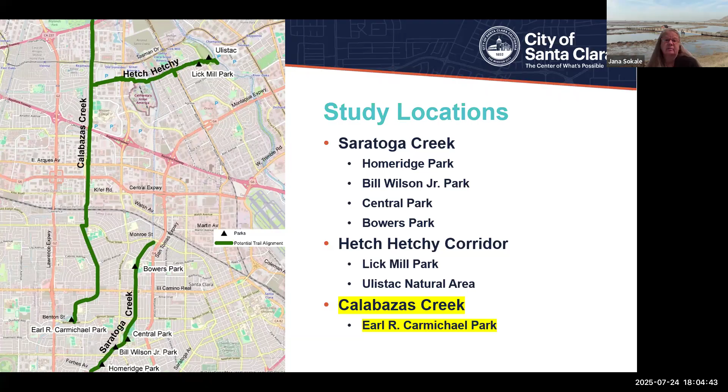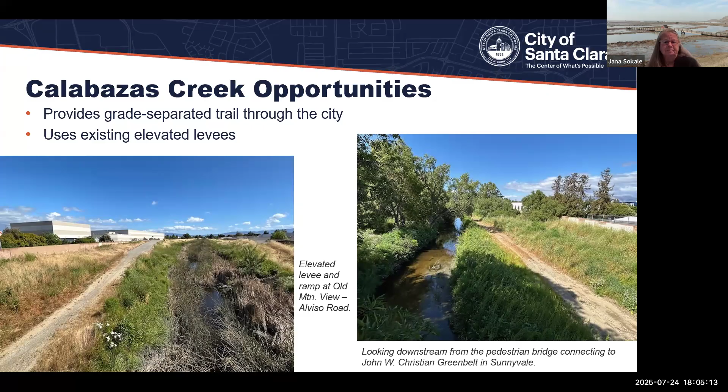Calabazas has many great opportunities for the city. I would say that it's most similar to the existing San Tomas Aquino Creek Trail that many of you may use. Most of the trail would be built on existing elevated levees that are owned and operated by Valley Water. The trail has many connections, direct connections into Caltrain and light rail, connections to area schools with Mission College and Wilcox High being right on the alignment. Businesses along El Camino would be served by the trail. You could ride your bike out to the AMC Theater Complex at the Mercado Shopping Center. And it would also connect to the proposed Hetch Hetchy Trail that provides access to many other key amenities within the city of Santa Clara.

None of these trails come without challenges. In order to provide a trail which is separated from car traffic, in evaluating all of the bridge crossings over Calabazas, we determined in the feasibility study that it would require 3 pedestrian overcrossings. Those are expensive structures, which pose a challenge. We also have new challenges that are ever evolving with climate change. Sea level rise has the potential to impact both existing trails around the bay as well as new trails that are being proposed. It's anticipated that some of the downstream trail underpasses would flood more frequently, and we need to consider those things in design.

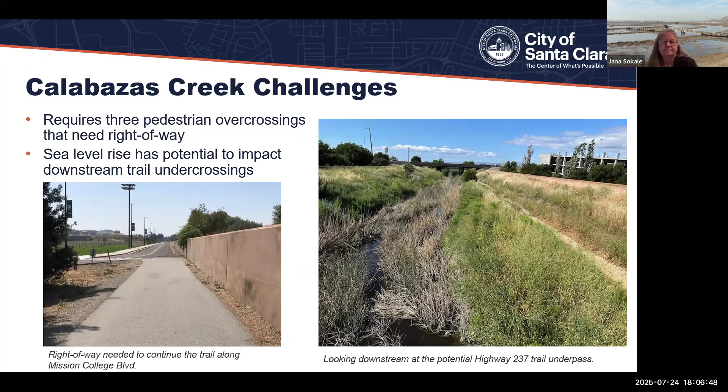So we have done quite a bit of community outreach. The city showcased this project both at Earth Day and Bike to Work Day. We introduced the Park and Rec Commission to the project a couple of months ago. We held a general community meeting introducing all 3 of the corridors and collected information from the community then. I believe that meeting was in person as well as hybrid. And since that time, we've done individual meetings on the 3 corridors.

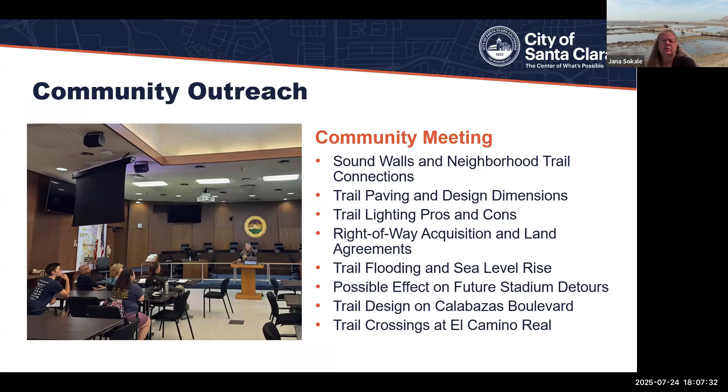We also went to the Pedestrian and Bicycle Advisory Committee, who had a number of comments on all 3 corridors. Some comments specific to Calabazas were the need to identify on-street routes for when the trail underpass is closed due to flooding. There was an idea to redesign Calabazas Boulevard so a trail could be near the creek yet still protected from car traffic. There was also a concept to identify easy, less expensive segments to implement first, plus additional comments spread across all 3 corridors.

A survey was conducted in the May-June timeframe. We asked 10 or 12 questions of the public. I could just highlight a couple for you.

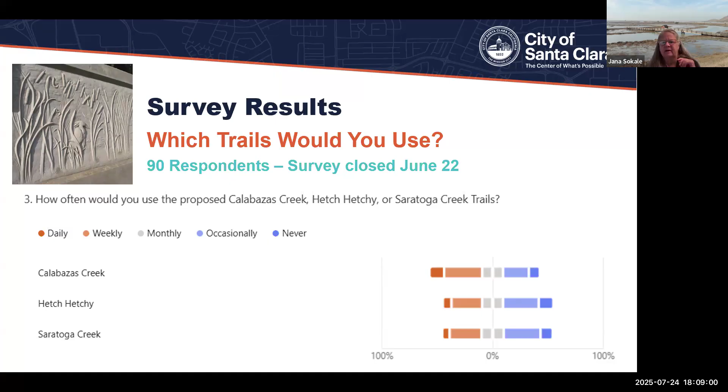We also asked trail users and survey respondents what they wanted most for amenities along the trail. These are the top 6 of the maybe 15 we queried on. Trees and restrooms were the top two, followed by shady trail and access to rest spots, bottle filling stations for folks trying to move away from plastic, trail maps and wayfinding signs to get around through the city and to other cities, and then wildlife habitat enhancements and trash receptacles along the trail.

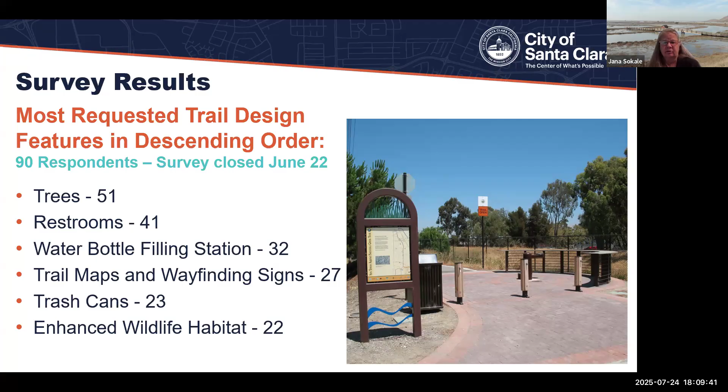Much of the emphasis is on the preliminary engineering, hydraulic analysis, and traffic analysis. And then from that will come reports.

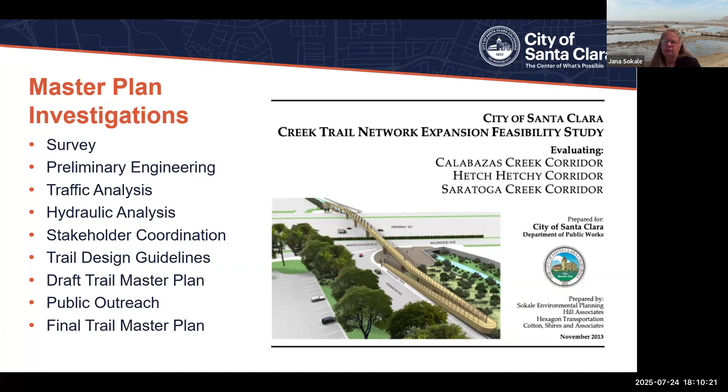When we look at feasibility and carry that concept into the master plan, there are a number of things that determine whether a trail may be feasible. The first, as you might assume, is land availability - who owns the land, are they willing to share it with the public, what easements cross that land, how wide is the top of bank beyond the hinge point of the creek where a trail might be located, what vegetation is there, what utilities extend through the corridor, and maintenance access to all of those utility providers as well as Valley Water must be retained.

And again, as I mentioned earlier, there's the whole aspect of climate change, sea level rise, and flooding - both from increasing tidal events as well as from potentially higher peak flows coming downstream during winter storm events.

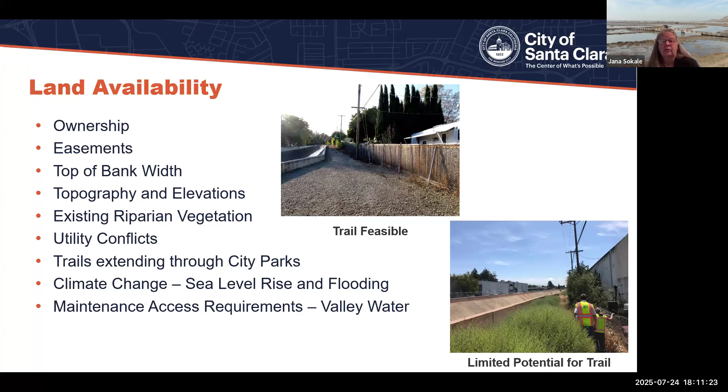There have also, since 2013 when the feasibility study was completed, been some changes in what I'll call stakeholder policies. The most recent one: Valley Water adopted criteria and guidance for how trails can be implemented on lands they own. The intent was to balance protection of stream habitat, wildlife, and sensitive resources with public access. Whenever we enter the environment, we immediately have an impact just by our presence, but also by construction changes on the land.

Hetch Hetchy, which is owned by the city and county of San Francisco, exists to convey large water pipelines from Yosemite all the way into Santa Clara and San Mateo County, and has historically been very receptive to having public access on their lands. You couldn't really build anything subgrade because the pipelines were there, but a trail on top of the land had always been relatively well accepted.

Now policies have changed over the years, and they're a little more concerned about opening access. They want to make sure good agreements are in place, and they want to preserve some of their right of way for future construction, or in the event of a critical event like an earthquake requiring lots of work on the pipelines. They now also charge fees for use of their land in order to be fair to their ratepayers who own and manage all of these lands.

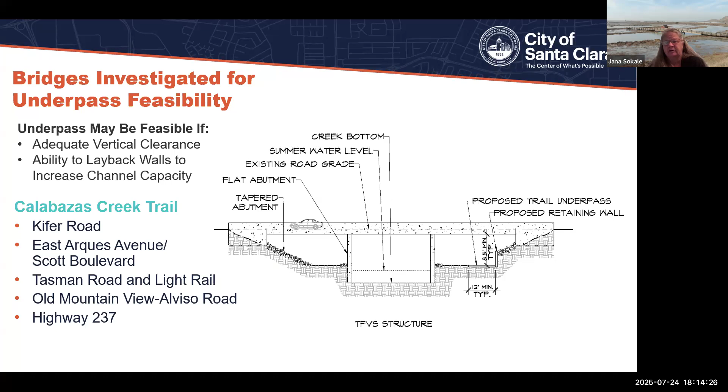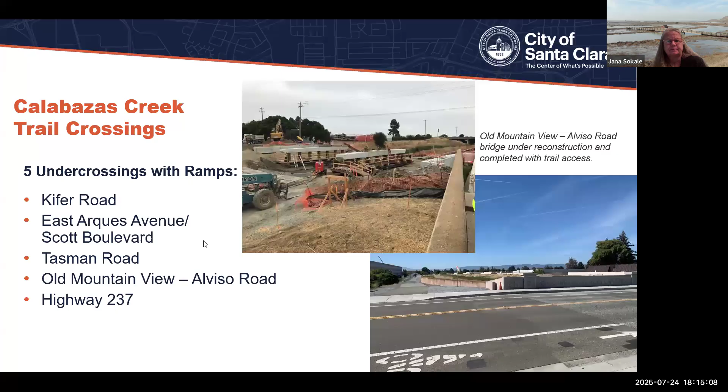There are also bridges that cannot support a trail underpass. Generally these are culverts, box culverts, where you cannot open the channel to allow passage for flow, and placing a trail into a culvert means adding fill. So overpasses might be needed at Highway 101, Caltrain, and Central Expressway.

There may be, and do exist today, at-grade crossings at Machado and Warburton, which are part of the bikeway plan along Calabazas Boulevard today.

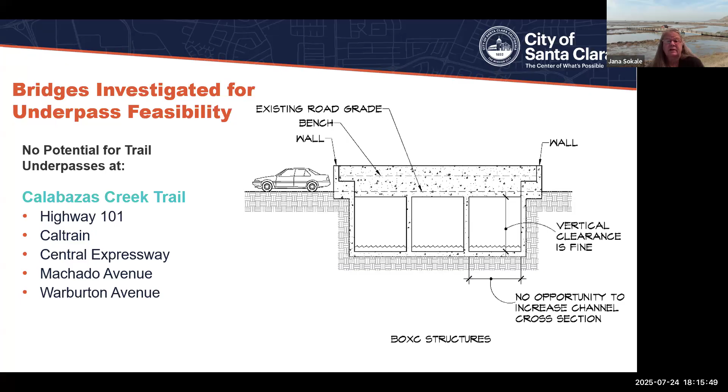There are other crossings that may potentially be needed. We mentioned the overpasses, and there are also some at-grade crossings. These are primarily along Calabazas Boulevard and exist today.

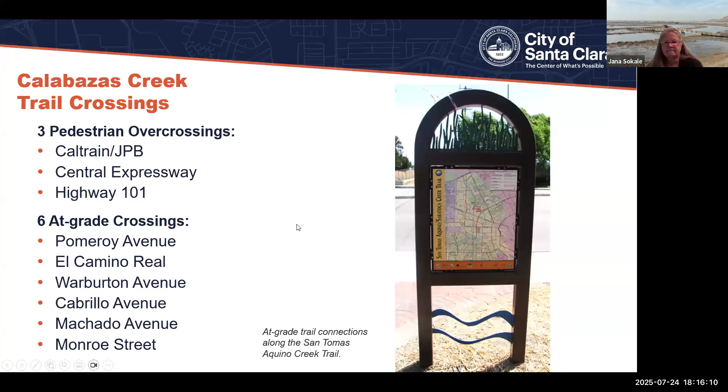There's potential also for two pedestrian and bicycle bridges. There's one necessary bridge to get to Earl Carmichael Park, which is on Benton, to get the trail from one side of the creek to the park side. And then there's an existing bridge that some of you may use, at Agate Drive. That bridge could remain or could be upgraded depending on the alignment selected at the Caltrain area.

We would also need to modify the bike lanes and sidewalks on East Arques and Scott Boulevard to accommodate pedestrians and bicyclists in that area.

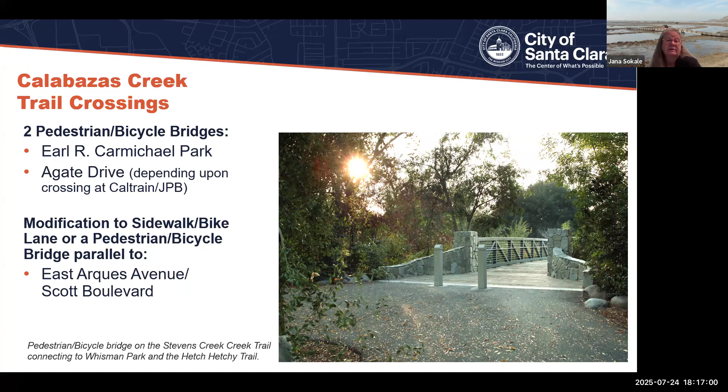We also worry about cultural resource sensitivities, though a little less so on Calabazas, because many of the places we're proposing trails are already elevated levees built on fill and not native soil.

So with that background, let me now take you through the alignments. You'll see this slide a couple of times through the presentation. In general, if you look at Calabazas Creek, anything in green gives you a sense that a grade-separated trail with underpasses and overpasses is potentially feasible. The purple line you see here is mainly Calabazas Boulevard, where we cannot put a trail below those streets, so we've proposed a different type of solution in that area.

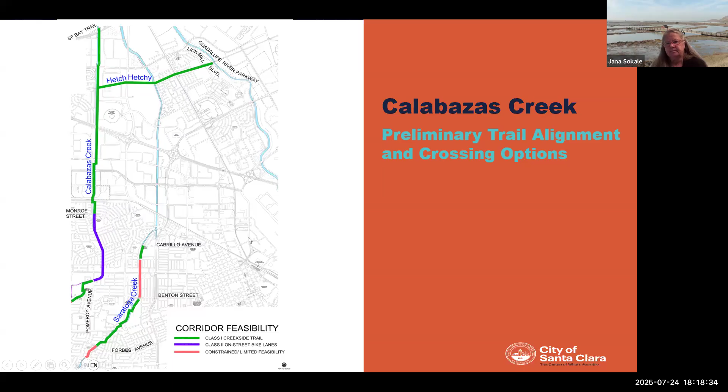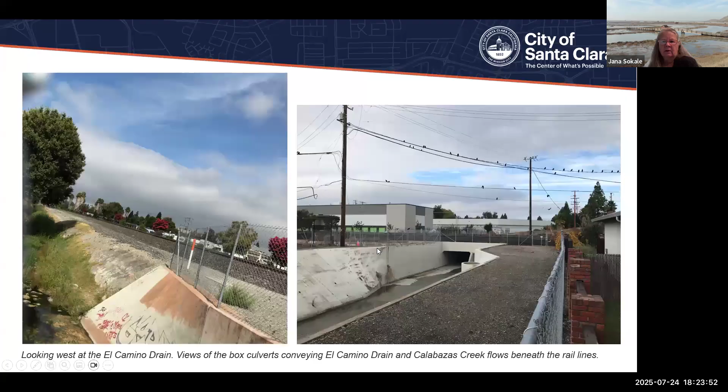So the ramping is long in order to meet accessibility guidelines and to get up and over the trains. It would then descend into a redevelopment zone that's along the creek to the south. That's one of those crossing options.

Let me take you to the second option. This option is a straight flyover, no switchback — all of these have different pros and cons. This would ramp up and over and then descend back into that redevelopment area.

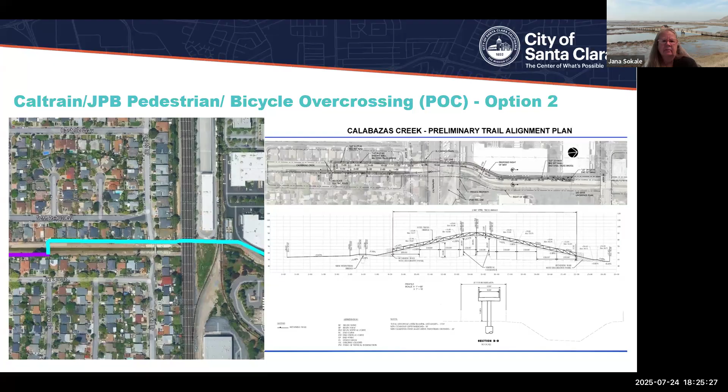The third option is an underpass — a tunnel option. This would stay on the right bank of the creek and would switch back down, and a tunnel would be bored underneath the train tracks. It would then come back up, switch around, and actually have to cross the Union Pacific tracks that still exist in that area. That train services some industrial buildings in the area and runs maybe once a week, so as of a couple of years ago that train was still active. That's a concern as to whether this option might be feasible or not.

Just to give you a sense of the three possibilities, all of these are being discussed with the stakeholders, including the Caltrain JPB, Union Pacific, Valley Water, and Sunnyvale, since some of these lands are in the Sunnyvale area. There's been lots of coordination to come up with an alignment that would serve the trail.

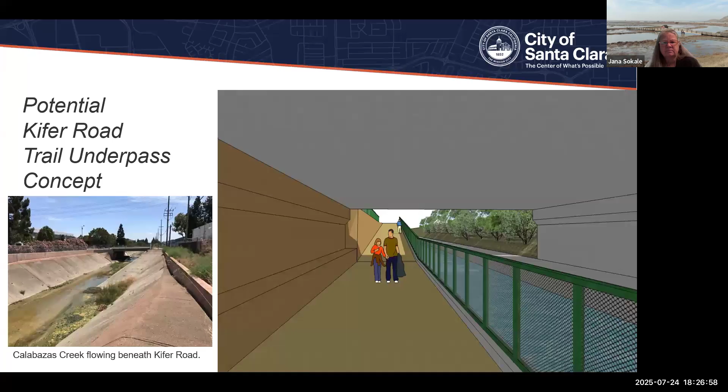The trail would extend along the elevated levees and descend beneath Kifer on a traditional trail underpass, shown in this graphic. I don't know that the railing would exist - we've been moving away from railings due to flooding issues, but it gives you a sense that you'd be down next to the water.

My thought is that at Central Expressway, the overpass looks very similar to this concept. There are some land limitations on the south side of Central where, as redevelopment occurs in that area, an additional 10 or 12 feet longitudinally along the back of the levee would be very useful.

Now moving downstream, we get to Highway 101. This is probably the largest span in length from a roadway that you're crossing. I'd say the JPB one is actually a longer structure because it has to be higher, at 27 feet. I think this structure is at 18 or 19 feet at height from the road surface.

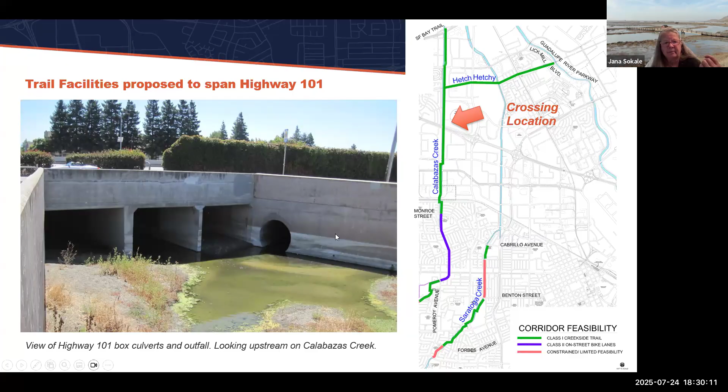Here's one view of what that overpass could look like. As it comes down to Mission College, it could ramp to bring people directly up to the crosswalk, or there's a possibility to extend it all along the flood wall. Mission College Boulevard would have to be somewhat rearranged to accommodate the space needed for the overpass in that area.

From Highway 101 and the Hetch Hetchy connection, the trail would descend below Tasman Drive, which conveys light rail through the city. On trail underpass, it would take advantage of the old Mountain View Alviso Road, where the head clearance has been created by the new bridge.

Then it would descend underneath Highway 237, ramping up to connect to the Bay Trail. Those two roads, Old Mountain View Alviso and Highway 237, are so close together that you'd essentially be down below the hinge point of the creek the entire way.

You can see from these photos that this area is tidal and has water year round, so there are sea level rise impacts to these lower trail underpasses in the years ahead.

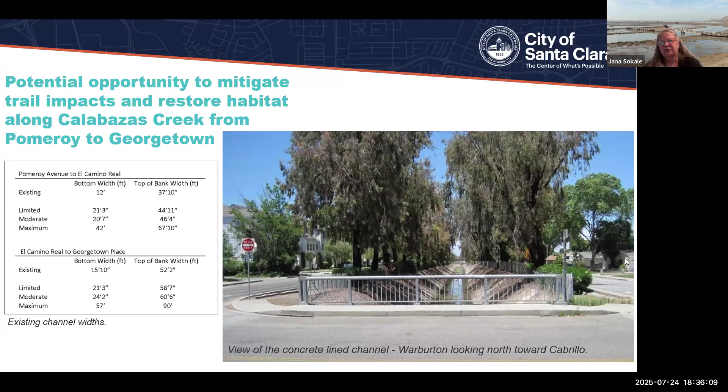We have looked at a way to re-green the corridor, several possibilities, which could give the city mitigation credit to offset the impacts of building the trails, and may even provide credits to Valley Water and/or credits for other projects within the city. If we go to the next slide, I'll show you one option. I want to preface this by saying the intent of this exercise was simply to indicate whether we could take concrete out of the channel, lay it back to create more flood flow, to provide habitat to create mitigation credits, and whether it would actually work hydraulically in order to continue to pass flood flows in these areas.

In doing that, you take away roadway. We have put together three potential options of what that new roadway would look like and how the creek could widen out, both north and south of El Camino because of the different widths that exist in those areas. This was not to come up with a specific design, but to determine what questions you would ask if you were to move forward with this. But the answer for all three options is that we have been able to find a way to pass those flood flows where some level of mitigation could occur.

This is the more limited habitat enhancement option. The next slide shows a more moderate habitat enhancement where the channel lining on both sides is removed, the concrete is removed, and the channel is laid back a bit. In all of these, you'll see a low flood wall along the channel, and then street trees planted outside and a trail along the creek.

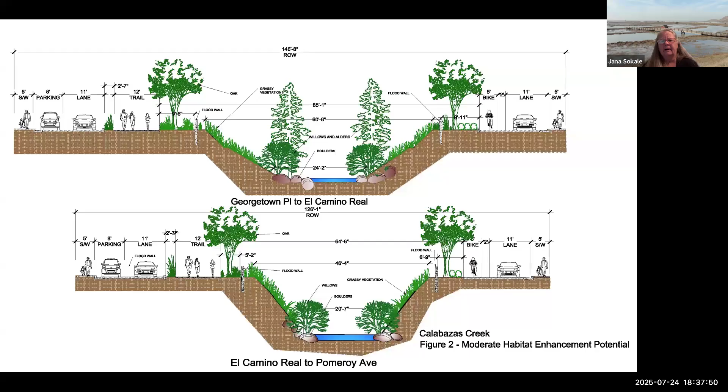And the third option eliminates even more roadway. The bottom of the channel becomes wider, and you get more of a low floodplain. Any of these would work, but it's a trade-off. You get mitigation credits, you get a beautiful green center of the city, but you lose some lanes of travel and/or parking - those are pros and cons you would have to consider. We were looking at a way to potentially find the mitigation necessary to move these trail projects forward, and this would have to be decided upon by all of the agencies involved.

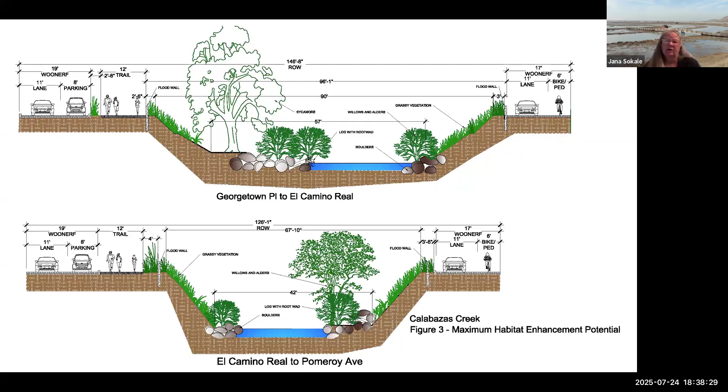And with that, just a reminder, none of these trail projects happen quickly. I think the San Tomas Aquino Creek Trail in the city of Santa Clara was built piece by piece in logical pieces that made good connections to the on-street system. But I think that took a good 15 years of construction and probably another 5 of planning in advance of that. But piece by piece, it happened.

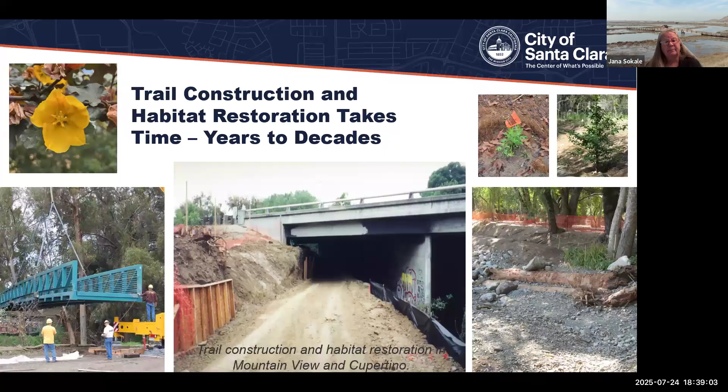Our next steps for this process will be to come back to the community with even more refined alignments in the fall or winter, circulate a draft trail master plan, and eventually come forward with a final plan in 2026. If you haven't signed up to get meeting details, please click on the QR code and add your name to the list.

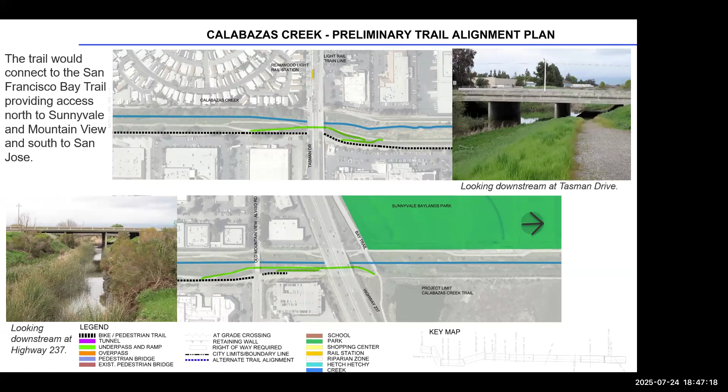Let's see, I put these in the Q&A, but I might as well read them off. There was one on the Agate Drive and the Caltrain. First of all, it's super important that we create additional opportunities for people to cross the Caltrain tracks, especially on foot and on bikes. That's a big deal.

I see at least one of the concepts here where you mentioned replacing the existing Agate Drive bridge. The existing Agate Drive bridge is part of a pretty important bike route that really goes all the way to Sunnyvale and even into Mountain View. So before you replace it outright, please understand what it's doing and make sure that the replacement also serves those functions. That said, I would be in favor of upgrading that bridge, as long as it's not holding up the whole rest of the project. Today's bridge is kind of small and seems a little bit old and rickety, to be honest.

And I've also found at least one time somebody parked kind of directly in front of the ramp, and on a bike you can handle that by getting off and walking a few steps, but in a wheelchair that might not be possible. So for the on-street part there, it might be worth painting a few feet of red curb.

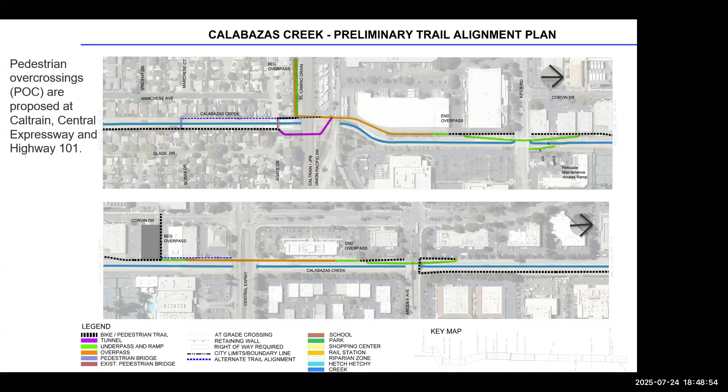There was a Caltrain crossing option number three that looked like quite a bit of tunnel. Yes, yes, and man, that creeps me out. I don't love the switchbacks and stuff. If we have to do that, we have to do that. But we need to think about how to make this not dark and creepy. I gave you an example.

They're actually doing some work on the 280 Winchester interchange sometime soon. But the Monroe and Moorpark has a big overcrossing, and then it has a tunnel, and that tunnel is dark and creepy, and I don't want to meet somebody in there, and it always smells like urine.

Betsy, one thing I failed to say in the presentation is the tunnel is open air until you get to the tracks, but you're still in a tunnel that's open to the sky. It would be sort of like a long canyon. Yeah, exactly, it'd be kind of like a canyon into a tunnel into a canyon. Yes, but better than being in a tunnel the entire way. Okay, but I hear you.

Those are still a little difficult. The bad example on the open air tunnel is the 87 bikeway, not so fondly called the jail trail by some people who have had to ride it.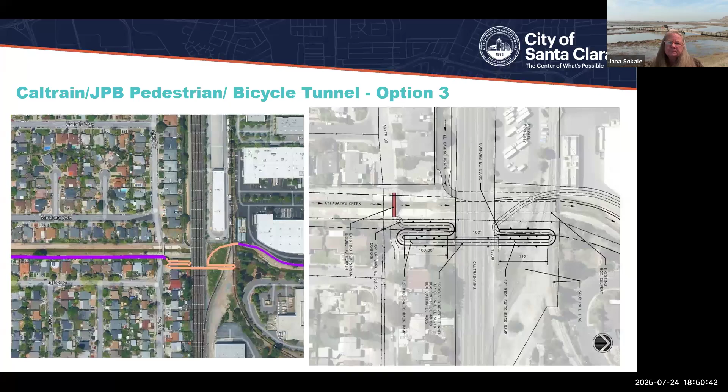Also, the switchback that you show in the Mission College overpass concept is a long way to walk. I think you got my comment the time before about making sure there's room to turn around a trailer or a cargo bike or trike or any of those things. I'm seeing an opportunity to put stairs up to the side of this, from somewhere on that concrete pad, for folks that would rather take them and ascend a little more rapidly.

And I know this is just a concept drawing for now. On Calabazas Boulevard, I hope we will come to a decision there that reduces the total number of travel lanes, because there aren't a lot of other residential 25-mile-an-hour streets that need two lanes in each direction, and I don't know that Calabazas Boulevard has the traffic throughput to need them either.

Reducing the number of lanes tends to reduce the speeds that people naturally drive. People drive to the design of the road, not the posted speed limit. So designing the road to look like it's meant for slower speeds would make the whole area safer in terms of traffic safety. And it also gives us a little bit of additional space that we can depave. So I think those were my comments. Thanks.

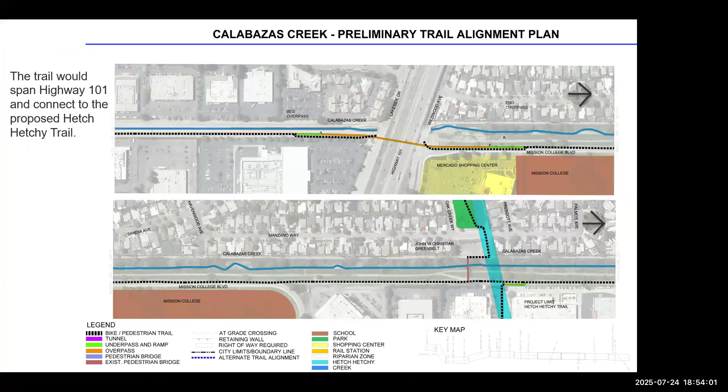I did put a couple of questions in the chat, but wanted to follow up. So I live on Pomeroy and my house backs up to the creek. And I didn't see that there was a slide showing what the creek trail would look like from El Camino to Benton.

So, Jen, in that area, it would stay the same as it is unless we go to the last three slides in the presentation, where Calabazas Boulevard in its totality would be redesigned and the creek would be widened out and the trail would then be on the city street along the creek somewhere. So that would be a complete redesign. Otherwise, it would stay the same, sort of as it is today, from Pomeroy all the way down to Monroe.

Meaning you're not on a trail, you're on the bike lanes between those two points. Oh, so you're not talking about actually making people walk like above the creek right now, where Valley Water drives their trucks and stuff? Not from Pomeroy downstream to Monroe. What about the other direction though?

In the other direction, from Pomeroy upstream, you can see the black dash line on what would be the left bank of the creek, on the opposite bank from Pomeroy Elementary School, and then bridging across to get into Earl Carmichael Park, extending through the park out to the crosswalk at Benton. Okay, so it's on the opposite side of the creek.

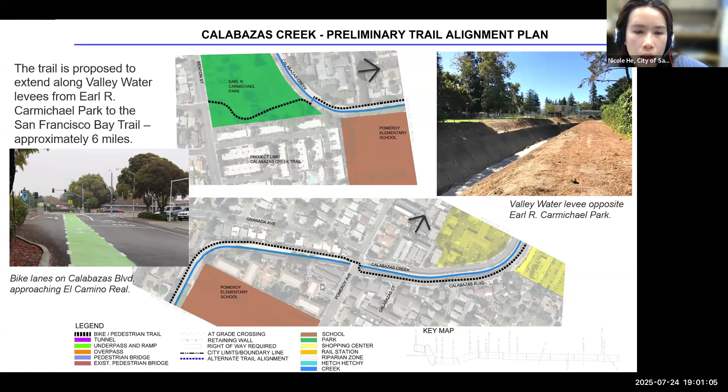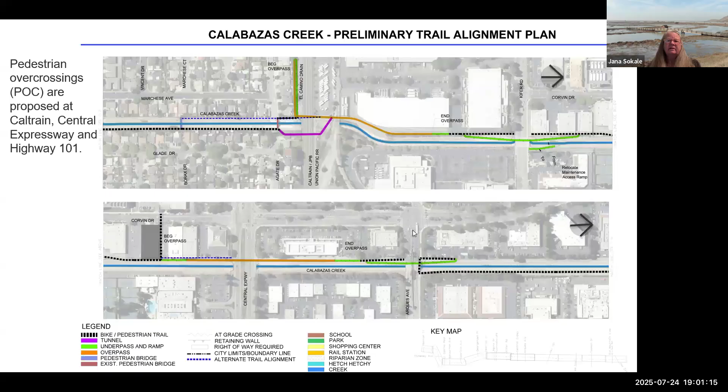Okay, next I'm going to go through the written questions and comments. First one: where will the trail fit? Is it all sidewalk/road or cemented creek, from El Camino to Monroe? Let's pull up that slide again - actually the last 3 slides, because either we retain the existing bike lanes or we do a redesign. In a redesign, you'd be removing concrete and asphalt to create more floodway for the channel and putting in a trail. In that instance, for those who know the area well, the eucalyptus and oleander that exist would come down and be replaced by native trees typically found in Santa Clara Valley along creeks.

Okay, thanks, Jana. And then Linda had a comment that the bike route is really bad on Calabazas, so we'll note that as documentation for this meeting.

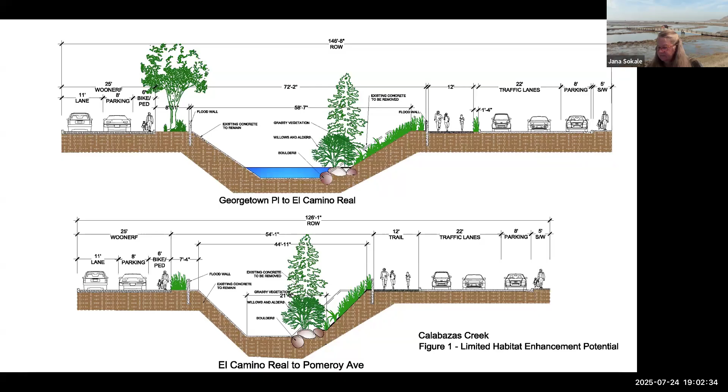Next comment from John: option 2 looks so much better - straight shots will have more users over time. Switchbacks are less safe and far longer, slower, discouraging use. If we build all of this, it should be built best for 50 years. John had another comment: 100% agree with stairs as a quicker bypass if we have long switchbacks - they're safer, especially with those 180-degree turns.

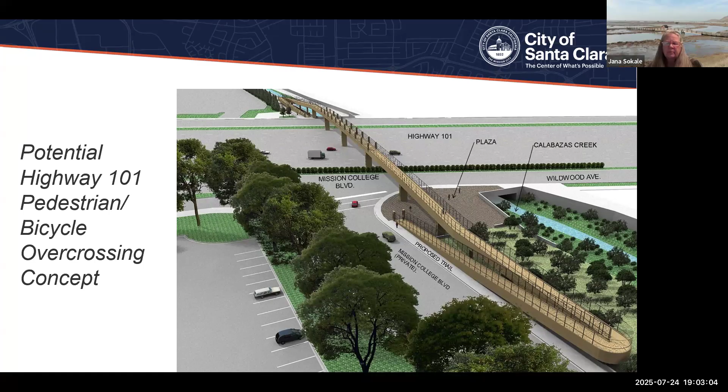And lastly from Jen: most of Calabazas is already a single lane with bike lane, only goes to 2 lanes near Wilcox. That was just a comment. I don't know if you have anything to add, Jana, about that. No, great comments.